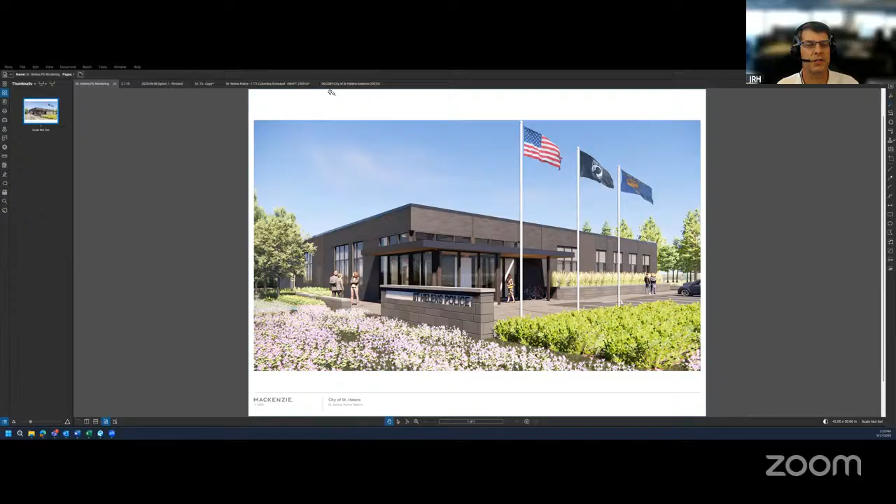Okay, so I have a couple different exhibits here. And I think more than anything, John just wanted me to be available to answer questions related to our proposal, since we're asking you guys to approve modification. But I did want to kind of give you the overview. So at the previous site, the Castor site, we had developed a building. That building had changed shape and programmatic pieces. This was the end result of what that building looked like.

This is police only. At one point, it included court and council chambers associated with it in a community room, but this is police only at the Castor site.

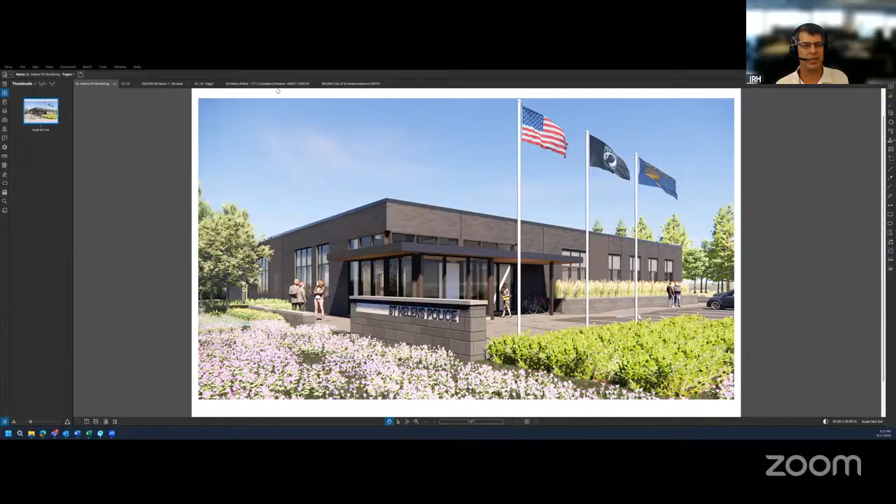When we developed that for that site, this is what the Castor site layout looked like for that building. Of course, we had some complications associated with that site, and we explored the Gable Road and the 1771 site.

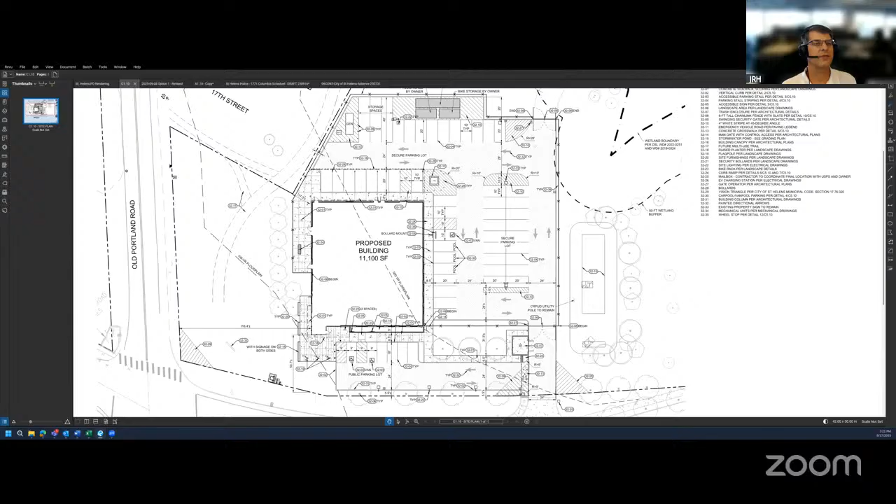One of the things we're looking to do is reroute this line so that it's not being impacted by the building. So I'm going to now toggle to the floor plan, just orienting you to how we would locate the building on this new site.

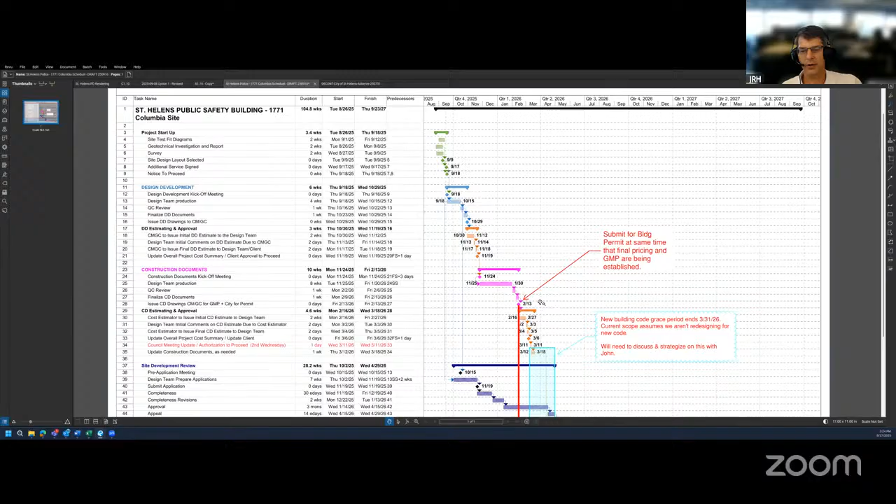I'll give you a sneak preview because you're probably interested a little bit. This is the preliminary. We still have conversations with John and Jacob that we'll be working through, and with Howard S. Wright, our CMGC. But right now, we're thinking we'll be going to sequentially completing the construction documents, submitting for land use approval, going through permitting, and likely we'll be in a spot where construction will be starting in the second quarter of next year and wrapping up in the fall of 2027.

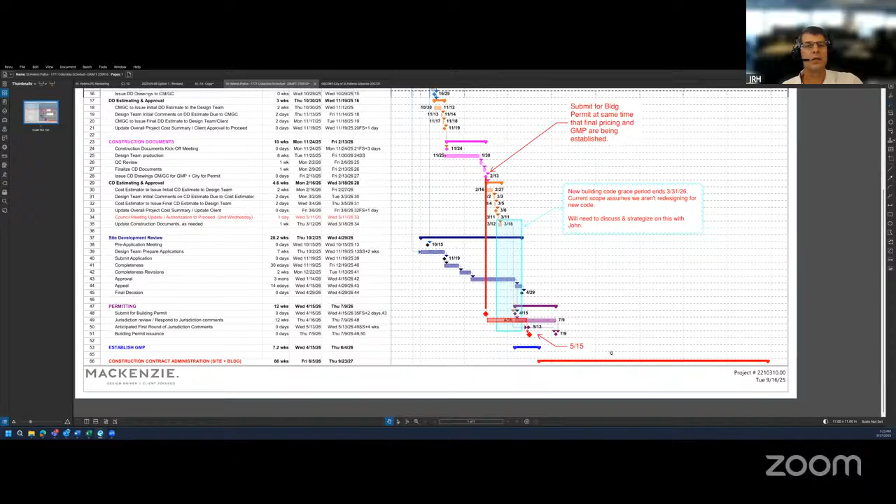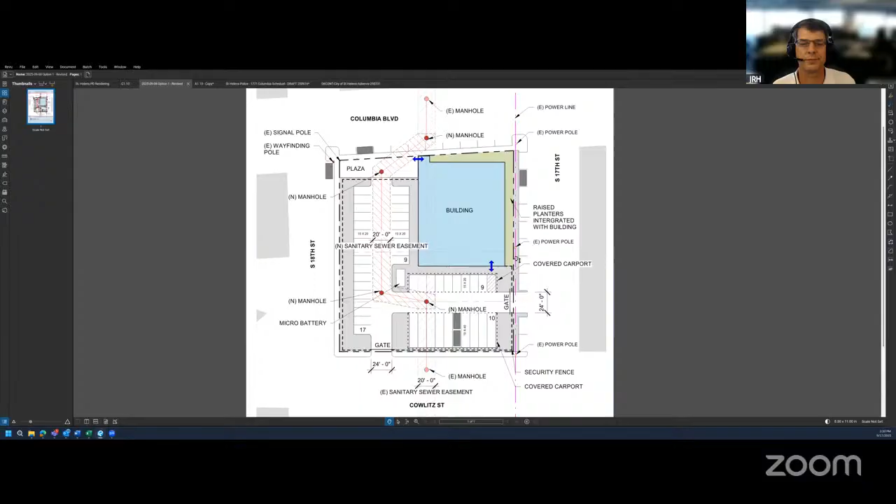I think that makes sense. My concern is really, is there going to be enough parking for the public? Are we giving a space that's open to the public to come to the police station?

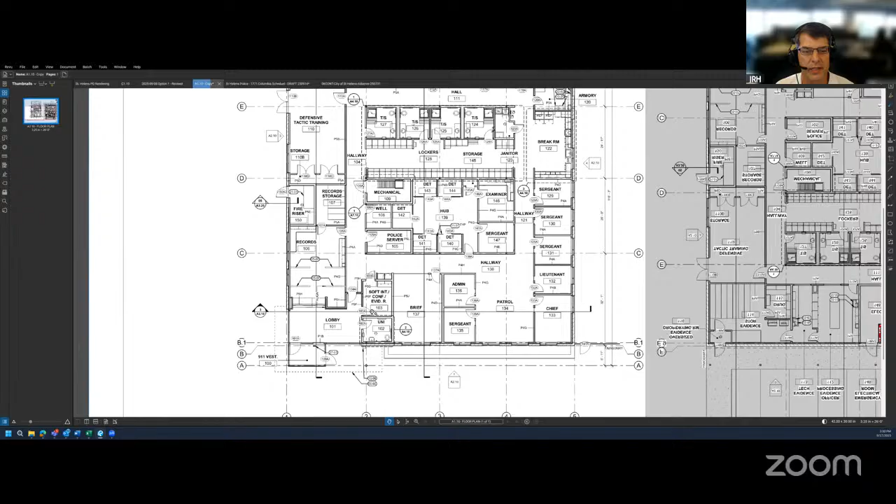That's a good point. We don't have a community meeting room, so the parking demand for this is 2 parking stalls. If you're coming to the police station, it's probably not something you want to do, right? Either something bad has happened to you or whatnot.

So this is the lobby here, this is the records desk, we have a public restroom, and an interview room. That's basically the space here that's open to the public, unless they're being invited into the secure portion of the station through this door. So there's not a big parking demand, is what I'm trying to highlight to you.

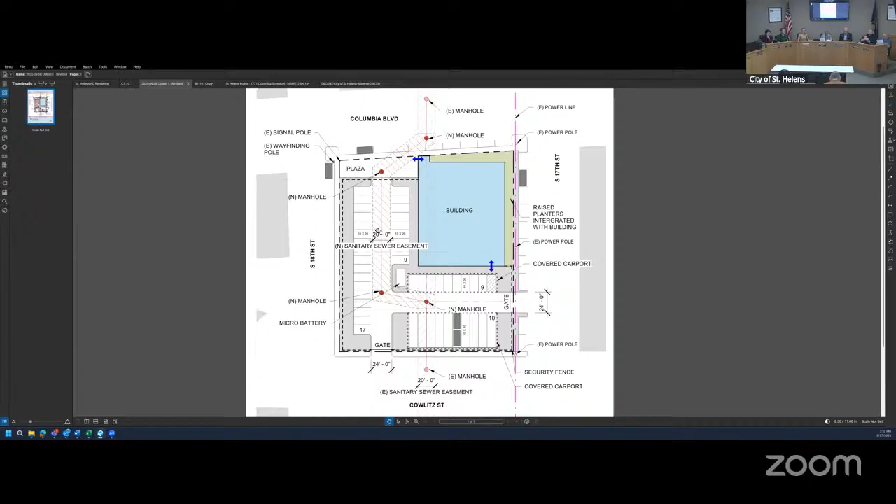We're going to have the safety room that we had discussed in earlier designs, where someone in event of an emergency, so that's going to be that space right there that you're circling. Yep, that's right.

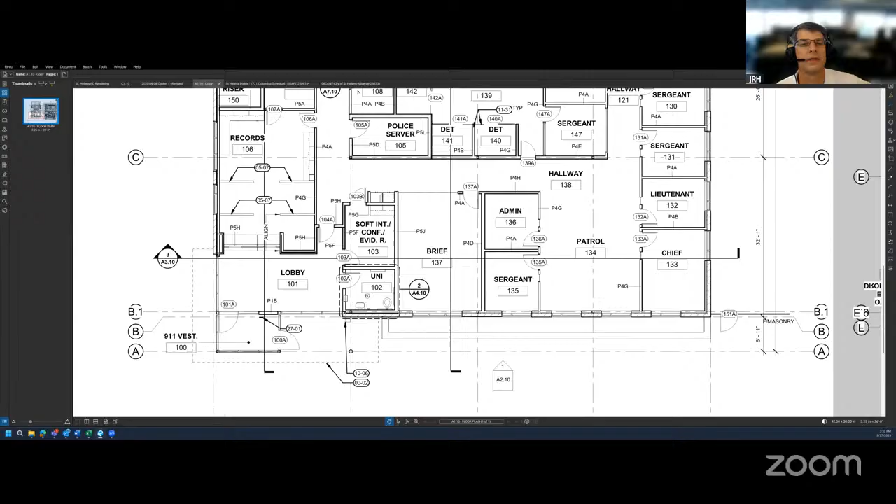Quick question on the T&M estimate in here. I don't see, let's see, that's the one part I'm also a little bit uncomfortable with, is typically seeing a T&M not to exceed, and I don't see that anywhere in here. I don't know if that's a discussion we need to have as well.

Okay, so I believe what we have set up for the T&M is the construction number. That's this dollar amount right there, 355,000 or whatever. But I think I'd feel better to have a not-to-exceed in there. It's typically what I'm accustomed to, a T&M not to exceed.

I have a question on 17th Street. You're not going to vacate anything then? That's correct, really good question. That was an option that we explored. There are electrical lines that run right on the property line on 17th Street, and they're actually on 16th Street as well. So one of the strategies we were looking to do is to not have an impact to those electrical lines, because of the complications associated with relocating them, the costs associated with them. And it doesn't just impact our property, it impacts the properties on the other side of 17th Street.

So the scheme that I just showed, where the planter is separating the building from 17th Street, that's pulling the building away from those electrical lines to provide allowance for tolerance during construction and separation from the building. But we did look at that. We were trying to figure out what made the most sense: encroach into 17th Street, reroute the utility line, or even narrow the building so it fit between the utility line and 17th Street. Then that forced you to move the sewer line.